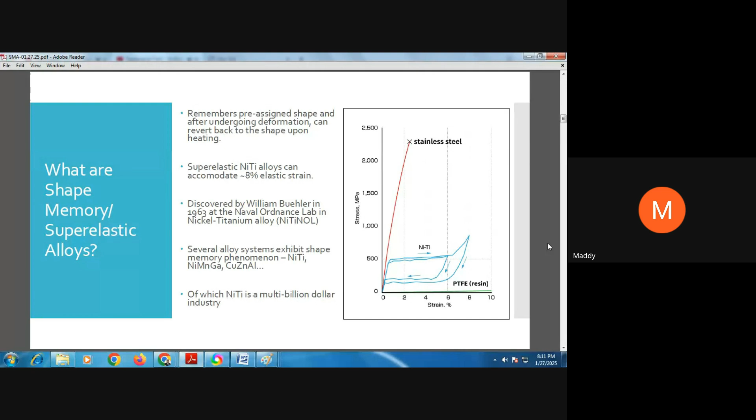Now, it was discovered by William Buehler in 1963. The name nitinol came because it was discovered at the Naval Ordnance Lab. That's why you have NOL and nickel titanium, so it's commonly known as nitinol. There are several other systems that exhibit the shape memory phenomena, but nothing is as commercially successful as NiTi. NiTi is approximately a multi-billion dollar industry, roughly in the range of $17 to $20 billion. Next slide, please.

So the question that naturally comes out is, what causes these shape memory and superelastic phenomena? If we delve deeper, just like what you have in steel, the phase transformation that happens in nitinol that gives these properties is due to martensitic transformation. Now, martensitic transformation by itself is a diffusionless transformation, so there is no long-range diffusion of atoms, and there's no chemical change in composition of the phases before and after the transformation.

But unlike steel, in NiTi, the martensitic transformation that enables shape memory is recoverable. And it's mainly because of what's called twinning. Without going into detail on twinning, I'll say that if you look at the two crystal structure schematics here, these are called the variants for martensite.

If you look at the image, the black outline is your cubic austenitic unit cell, and the red one is the martensite unit cell after the phase transformation is completed. For simplicity, what you see here is from cube to an orthorhombic crystal structure, but in reality there's also a distortion involved, which makes the orthorhombic transition to a monoclinic structure. So in the austenitic phase you have a cubic structure, and in the martensitic, low temperature phase, you have what's called a monoclinic structure.

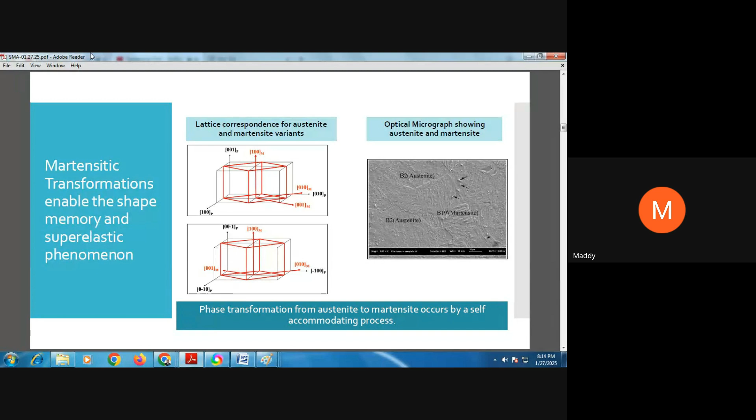As far as NiTi is concerned, the majority of our talk will be on NiTi because that's the most successful alloy, so we'll focus on that. There are three pathways for the phase transformation to happen in NiTi, dependent on a couple of factors. One is the addition of ternary elements. When you add a third element, for example iron or copper, you will have an intermediate phase through which the phase transformation occurs.

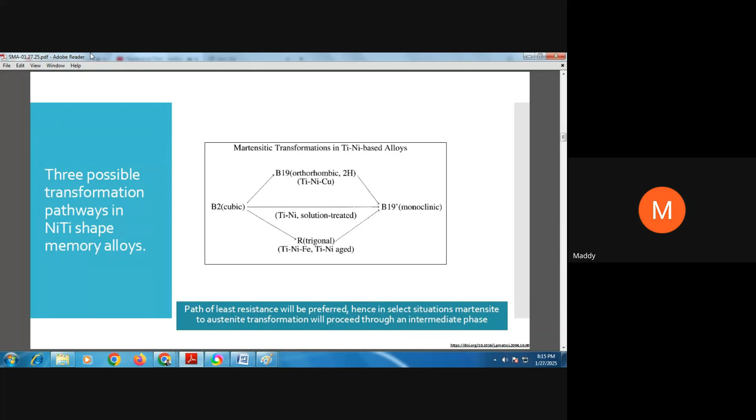Alternatively, based on your heat treatment—aging, cold working, annealing—you will also have an intermediate phase called the R phase. So there are multiple pathways through which the transformation can proceed from the high temperature austenite phase to the low temperature martensite monoclinic structure. Long story short, the path of least resistance will be preferred by the alloy, so you can actually tailor which treatment you want and how you want the transformation to proceed.

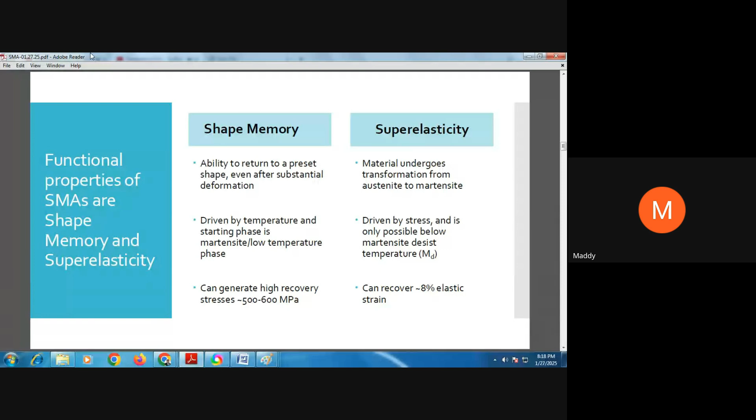Where are these used? These are used in medical applications like peripheral stents and heart valves, and you'll see some of those down in the presentation. So these are the two major reasons the alloy is used in medical and aerospace industry. It's also used in consumer industry, like mobile phones, where they are used for camera stabilization. There are several applications, but I'd say 90% of the applications are in the medical device industry.

So as I mentioned, we will talk about the characterization of shape memory alloys here. There are different ways in which you can characterize the alloy, but in this industry there are three which are predominant.

One is the thermal technique, shown in the first column, where you have what's known as a differential scanning calorimeter, or DSC, used to quantify the transformation temperatures. The first chart is a schematic of the DSC, with heat flow on the y-axis and temperature on the x-axis. Through this, when you heat and cool, you predominantly characterize three temperatures: the start, the peak, and the finish of the forward transformation from austenite to martensite, which occurs on cooling, highlighted by the blue arrow. Then on heating is the reverse transformation, where again you quantify the austenitic start, peak, and finish temperatures.

DSC is typically used at the ingot level, or when you want to determine the composition of the material. We'll talk more about it in the melting slide, but DSC is used at the extreme upstream of the material manufacturing process.

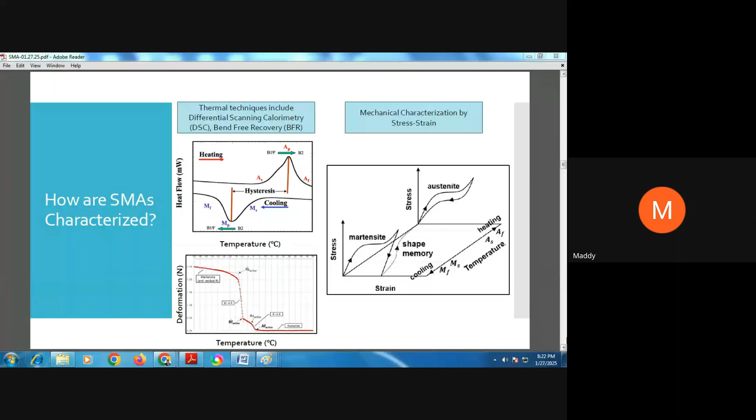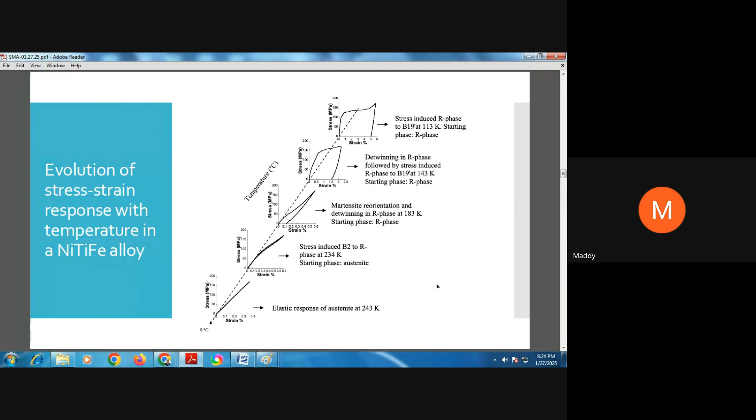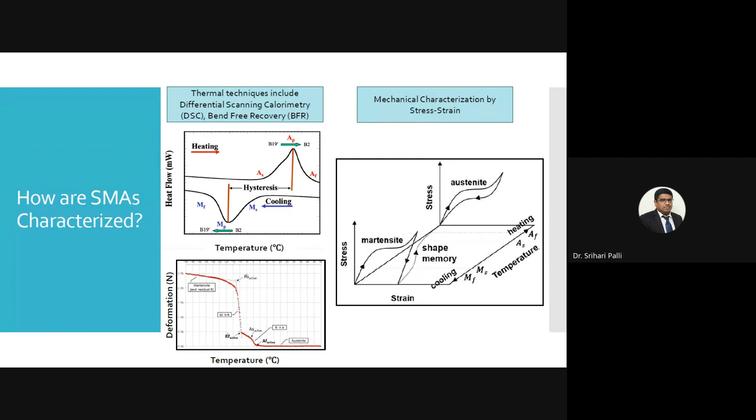Thank you. Any other queries at this point of time? Okay, yes sir, let's go. Excuse me. Sure.

Sir, you said there are many applications. Is there any biomedical application related to shape memory alloys?

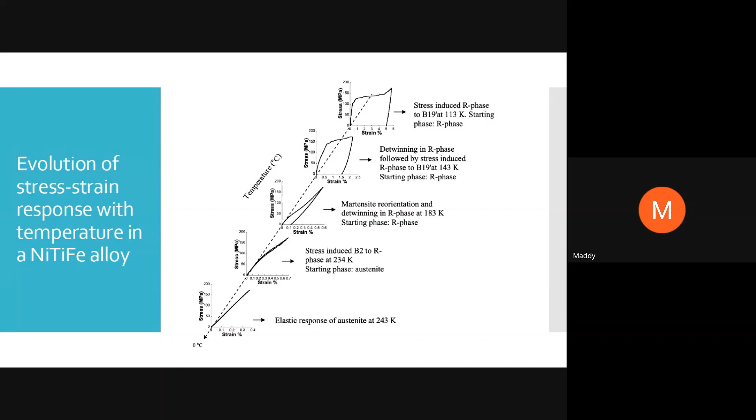So there is a lot of biomedical application from the superelastic standpoint, but on the shape memory side also there are certain applications. What I can tell you right now is there are some in the bone clip industry, for when you have a fracture, to join the bones. So there are some bone nail clips that employ shape memory. And then there's a company that also uses this shape memory effect in one of the glucose meters. So there are a few applications like this, and probably also in the orthodontic industry, which make use of the shape memory alloy functionality.

Oh, thanks. Yeah, okay. So can we proceed, sir? Yeah, we can. Okay, proceed. Perfect, good questions. Now let's jump on to the next slide. You can skip to the next slide also, and the following slide as well.

So we will talk about the fatigue of shape memory alloys here. Now fatigue is pretty critical for any application, and the same thing applies to shape memory alloys. But the challenge is there are two types of fatigue. One of the questions just a few minutes ago was how things will change with cycles, right? So you have what's called functional fatigue, and the second part is structural fatigue. These are two different things.

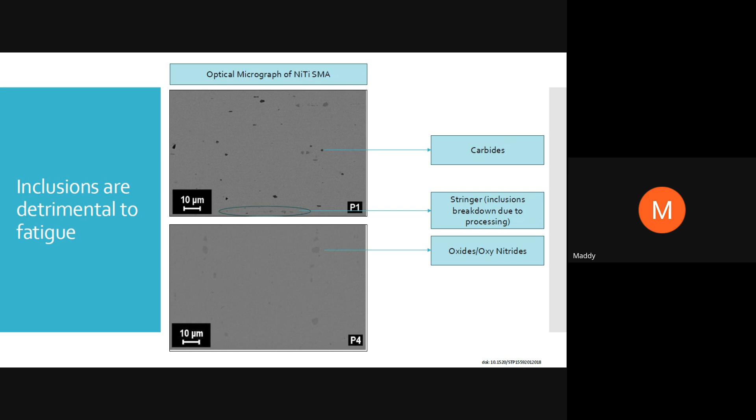It will give you an indication. So people actually characterize the inclusion size and area fraction, and specify it. Even ASTM F2063 also calls out for this, but that's only on hot rolled products. There is no specific information on cold rolled or cold worked material, and that's what is critical. I'll leave it at that, but this is just to show you the different types of inclusions recognizable from your optical image. Next slide, please.

For all the charts and images presented in this presentation, you can see in the bottom right corner the reference from which it was taken. So feel free to explore that.

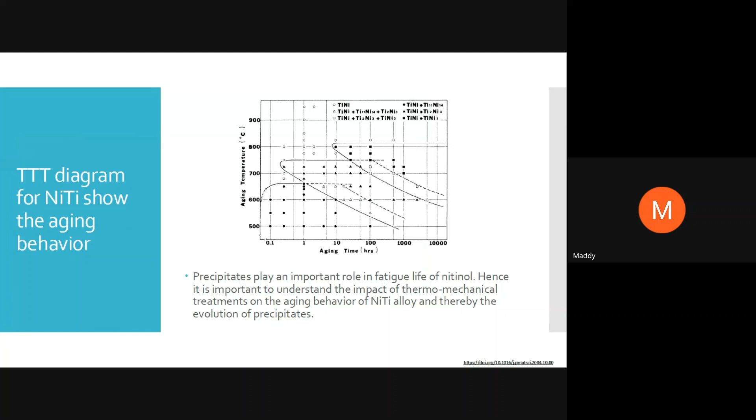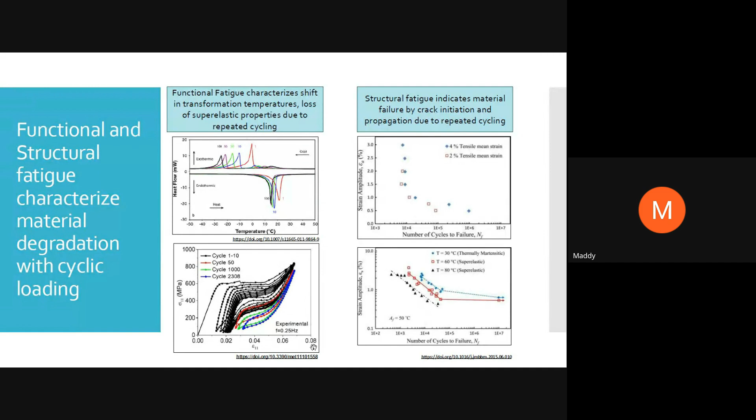All right, thanks. If we can go to the slide after application, slide number 20. Yeah, the next slide, please.

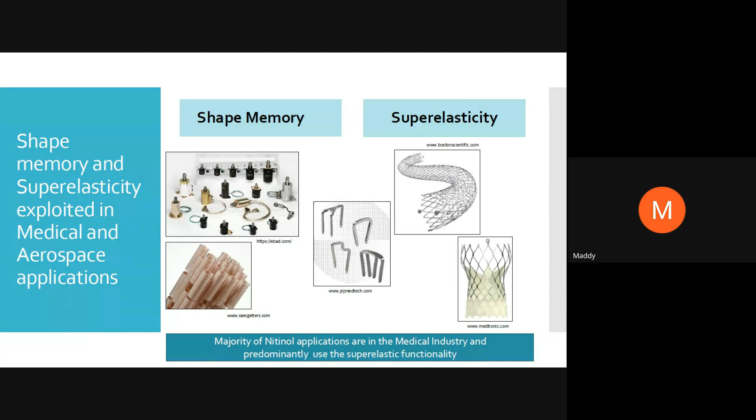This is actually very important and it goes back to one of the questions asked earlier. The stress-temperature correlation, or equivalence, is also very important — this is known as the Clausius-Clapeyron equation, a relation in thermodynamics. You can quantify the stress needed as a function of temperature. In real-life applications subjected to harsh conditions, as temperature changes, the stress may change as time evolves for that particular application. This correlation is extremely important for the designer to understand when designing the product.

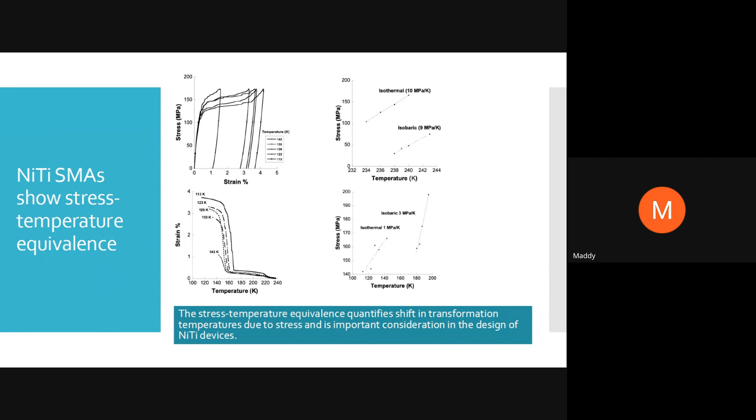The last few slides will talk about the manufacturing of shape memory alloys. We'll start with how it gets melted. There are, I would say, 3 techniques, actually 2.

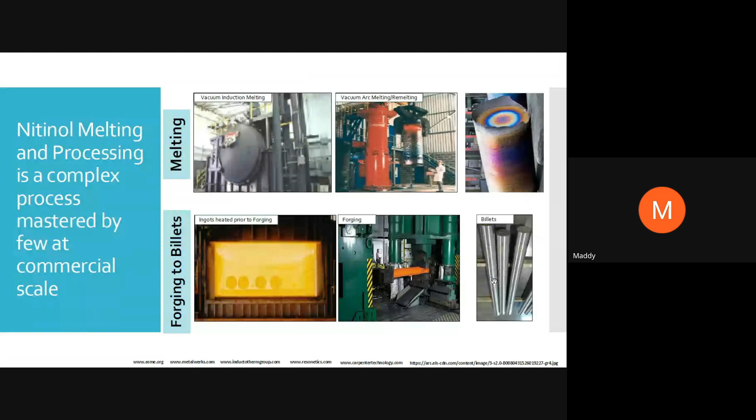And then subsequently, if you go to the next slide please - okay, so I was mentioning that it's a challenge to melt nitinol. Why? Let's look at the phase diagram.

People have been able to work around it - they've come up with innovative ideas and have been able to melt it. So when somebody asks you, what's the chemistry of the NiTi alloy, it's very difficult to answer. Rather, the question should be, what is the transformation temperature?

That's why if you look at the ASTM standards, F2063 and others, they insist on specifying the transformation temperature. Most go with austenitic start or austenitic finish temperature while specifying their alloy. So if somebody says they can give you the chemistry of NiTi alloy, it wouldn't actually make much sense for us, because of the sensitivity of these nickel-titanium ratios.

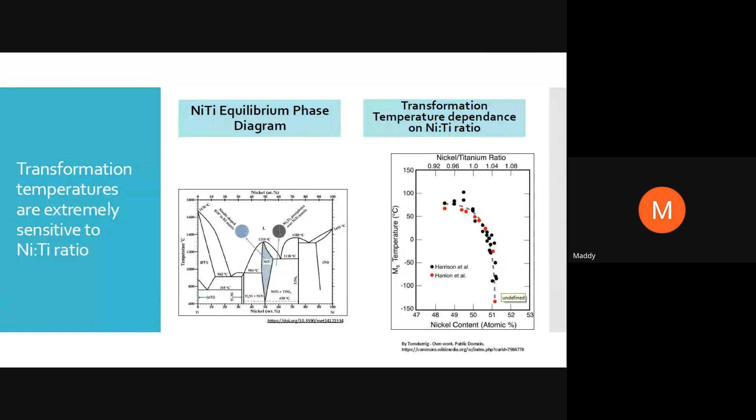There are a few other systems that are also commercially produced: NiTi iron, NiTi cobalt, NiTi copper, as well as NiTi chromium. These are some of the ternary alloys that get produced, and there is extensive research being done at several universities and research labs on NiTi hafnium, a high temperature shape memory alloy, and NiTi palladium for applications in aerospace.

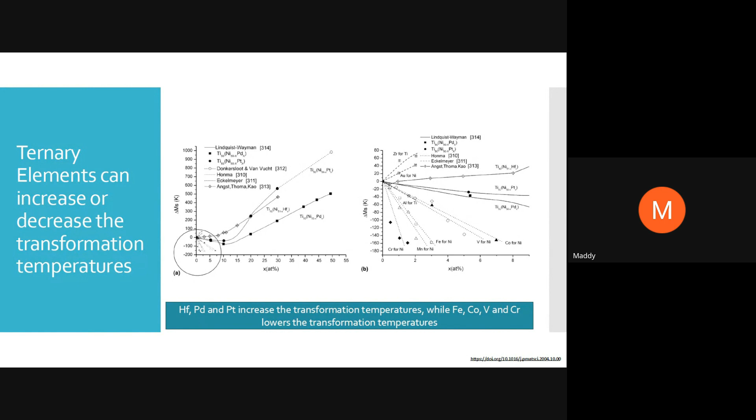So I wanted the audience to appreciate starting from such a big ingot, how much reduction we are putting in, and this actually goes inside your body. So the buy-to-fly ratio is pretty high.

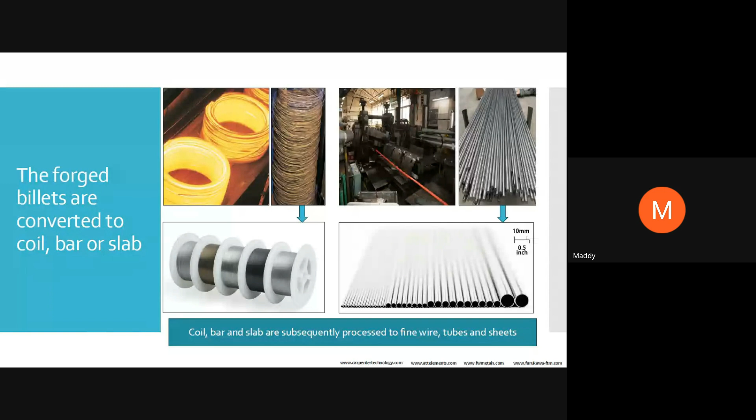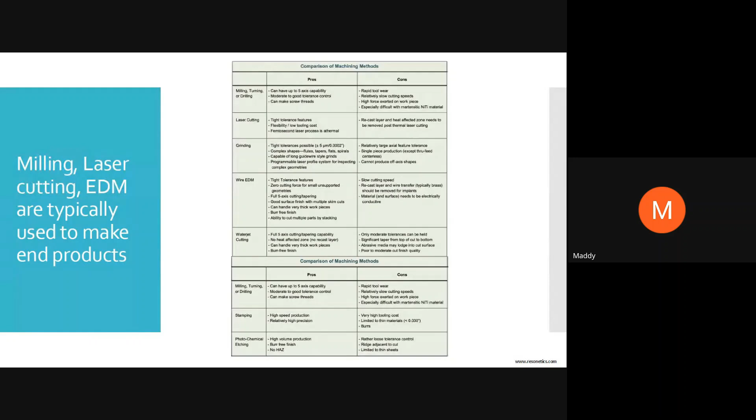We're coming to the end of the presentation. It's important in any area we're working on to know how the industry is, who the players are, how things evolve. So with NiTi, I thought we should have a look at the supply chain here, starting from melting. There are a lot of players, but I just listed the top few players in each segment.

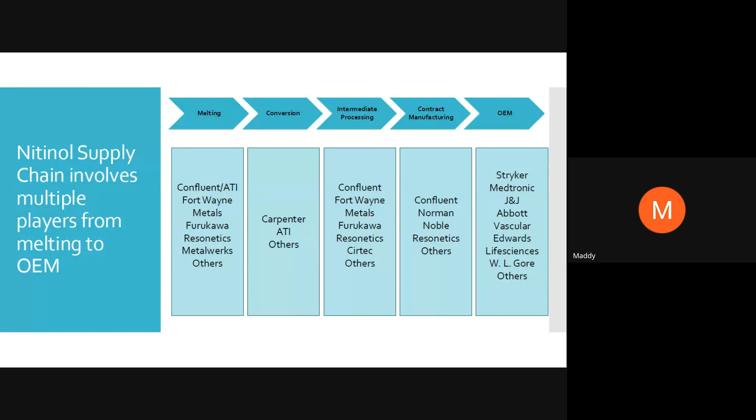And then finally you have the OEM. The OEM, some of them may also do the processing and make the devices in-house, while many outsource the work to contract manufacturers. The final step of passivation, cleaning and all those things, some of them may do in-house. But those are the big names you see in this industry. As I mentioned earlier, NiTi by itself is roughly a $17 to $20 billion industry, with all these applications, and it continues to grow in double digits.